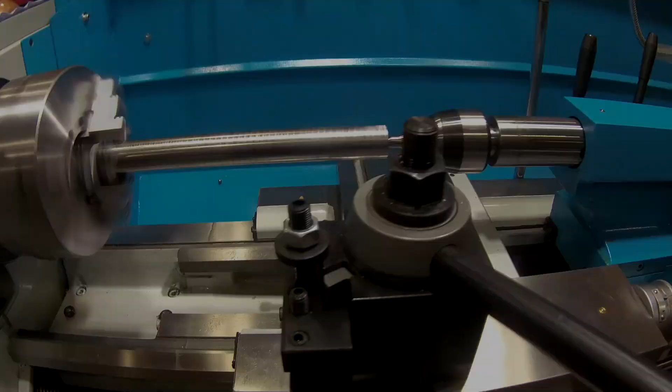This time around we have another interesting project from that welding company I do some work for. They do mostly laser welding, but they've broken out into regular welding. I think this will be MIG. What they need is a fixture to help them put these guys together. Maybe you can tell what they are. I feel like I'm channeling Curtis down in Australia at this moment.

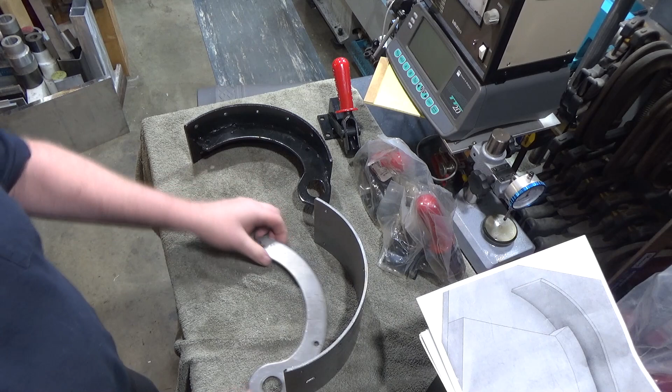I don't know why, perhaps it's because these are brake shoe assemblies for Caterpillar heavy machinery. This is a 4-inch, this is a 5-inch, and they also have a 3-inch, so I have to make a fixture that will hold this piece in place so that it can be welded. It needs to be flat and parallel, and there needs to be almost zero gap between this outside piece and this webbing right here - they call this the web. So there needs to be almost no space here, but as you can see, there's quite a bit. I think you can see anyways.

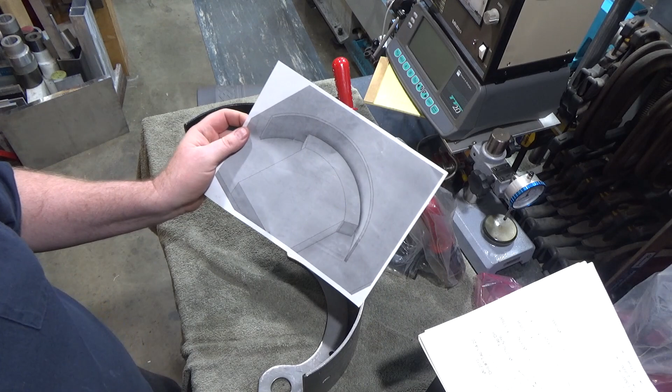So we need to make a fixture and we need to press these pieces together. So that's going to be quite a task. So I've sort of got an idea here. Here's sort of the rough idea of my fixture design. It looks really simple. So basically it is an aluminum piece that this guy sits down into with a lip.

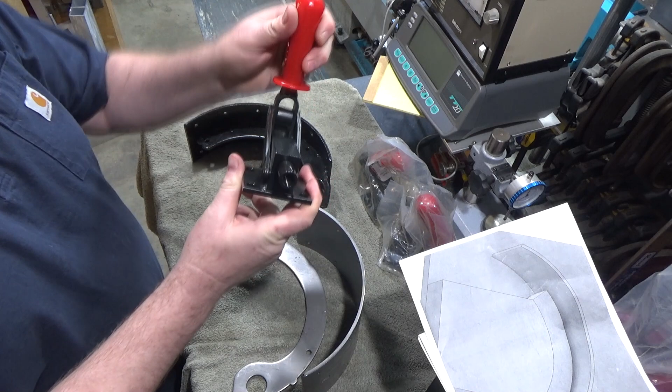And I'm going to press this guy using 3 of these extremely heavy duty, I think they're about 6,000 pound lever pressing feet. I'm not sure what you'd call them. A few moments later: these are called push toggle clamps. And this one's good for about 5,800 pounds holding force, which should be more than plenty, I think.

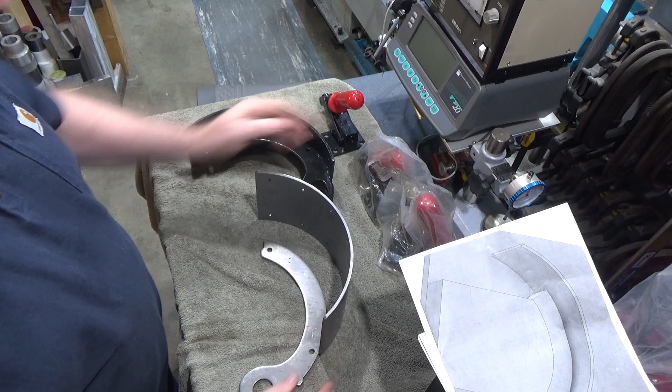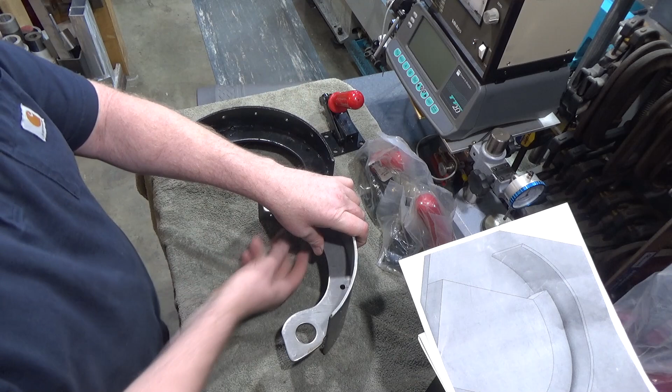I've got to be able to deform this guy, so there will be 3 of them. One will press in the middle to center this guy. This guy is located by this little pip sitting out here. So the first one will press dead center, which will press this guy into the center, and then I'll have one from this side and one from this side to deform this part so that it matches.

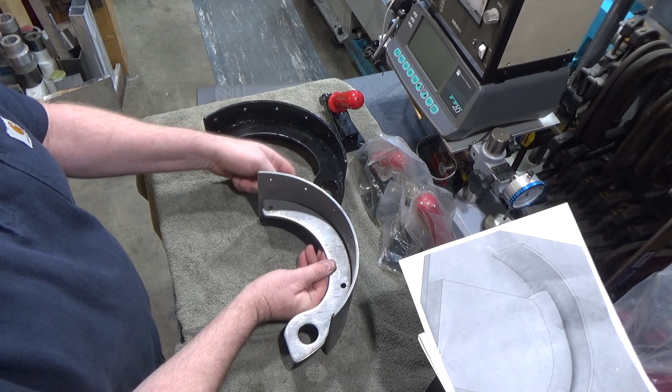Let's see, what else? This will be held at the height for a 5-inch brake pad, or brake shoe - I think these are brake shoes technically, right? So this will hold this at 2.5 inches. For the smaller ones, the 4 and the 3-inch one, what I will do is this guy will be held in space for the largest one, and then for the smaller ones I'll build spacers that hold the plate that the pad is actually mounted on up, so that I can handle one fixture for all 3 types of brake pads or brake shoes.

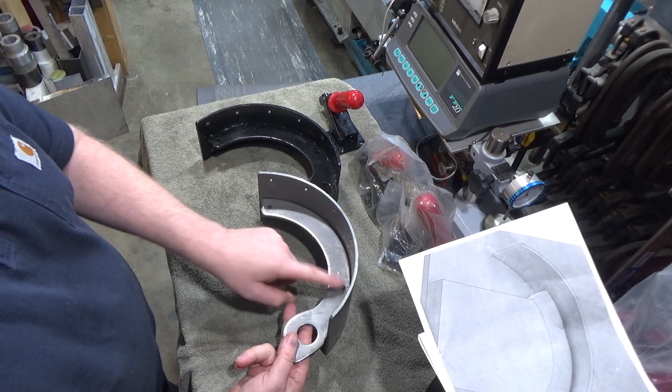I guess again these probably are brake shoes. One of the big problems with this is trying to locate on this part, number 1. Leave enough clearance so you can get a MIG welder to weld like here to here and here to here. All of that is going to be challenging. There are no good location points on this guy. Everything is really loose spec, but then they want the final part to be relatively tight spec. Also, how do you weld one side, then weld the other while keeping it in a fixture?

So what I'm going to do is I'm only going to support it in the middle here, as you can see by this design. So we're going to support this guy in the middle. And that way, when I flip it 180, the part will sit, well, the whole thing 180. The part will sit and also be supported both directions, and the toggle clamps should be able to hold this all together while you do the backside weld.

I think the way it's going to work is they will do 2 or 3 or 4 tack welds on one side, flip the part over, tack weld, weld all the way around, flip it back over. You can take the part out now and weld it all the way over, something like that. I haven't worked out the welding scheme. That is actually for the professionals to do at welding. I am definitely a rank amateur.

Now, the next set of difficulties, besides the fact that everything on this part is extremely loose tolerance - they show a drawing of this part individually and the whole assembly together, and guess what, these datum points, they're varied. You'll notice that this final part has this ground part here, and apparently what they do is they grind this after it's together, as well as this part over here after it's together.

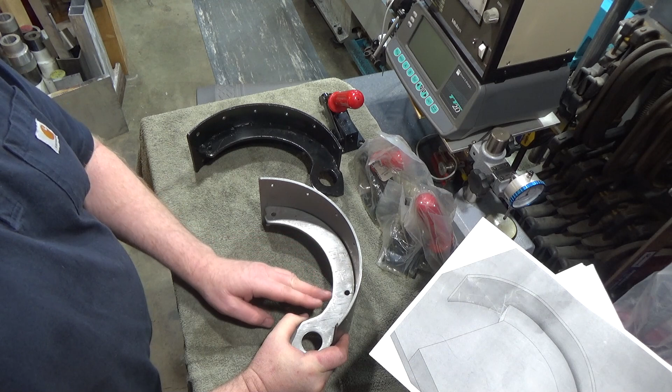We're going to hold it here and press this on, and hopefully that'll be good enough. The one thing they've had problems with in the past is keeping this parallel or perpendicular all the way around and equidistant from both sides. Hopefully we'll solve that, and the part will be accepted when they finally grind it and meet their specs for Caterpillar.

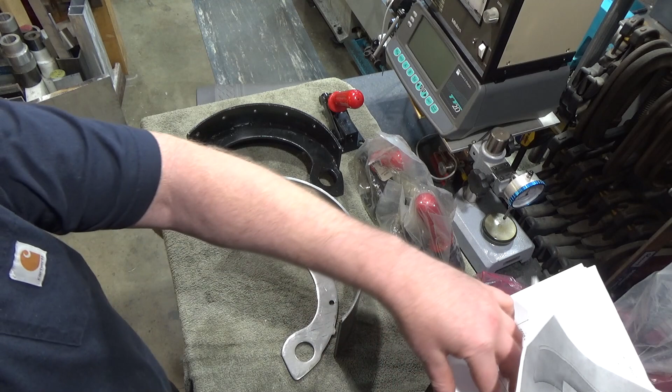The next bit of difficulty is that these radii are so big they're really too big to handle comfortably in my lathe. This is about 11 and change inch diameter. I have a 14-inch swing lathe, but my largest chuck is a 10-inch chuck, which means I'd have to try mounting this to a faceplate.

I do have a very large 12-inch diameter, 3-inch thick round of aluminum. That's one way to do it, and I need to figure out how to mount that to the faceplate safely. The thing weighs like 40-some pounds, kind of a scary thing to be swinging around on your lathe. If it's not perfectly balanced, you probably have to go really low RPM for safety's sake.

However, I think what I'm going to try first is this. I found a scrap piece of aluminum that I might be able to make work. Let me bring you over. Okay, so here's a really decent sized chunk of aluminum.

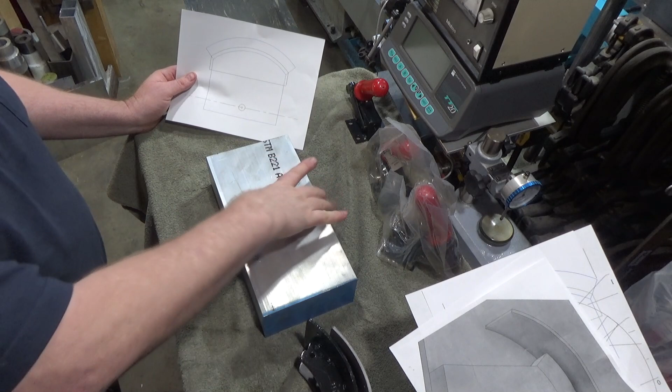It's 3 inches thick, but I don't need 3 inches. I need something like a little bit over 2.5 inches, like 100 thousandths over, so 2.6 inches thick. We're going to remove some material off there. I need the full width, and it would actually be better if it was a little bit larger, but we're going to go with what we've got, so it's not going to be quite as wide as I'd like.

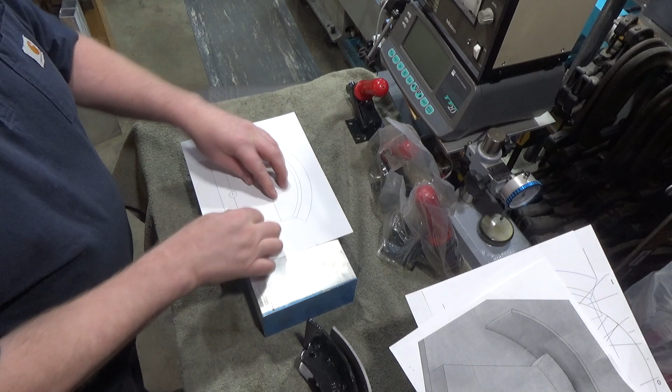Here's the part. It just barely fits edge to edge on this piece. This top part of the radius meets one edge, and the other part is now on the bottom. So I need to cut a chunk of this out, then cut this large radius, and then do an inset portion, because this part will sit right here.

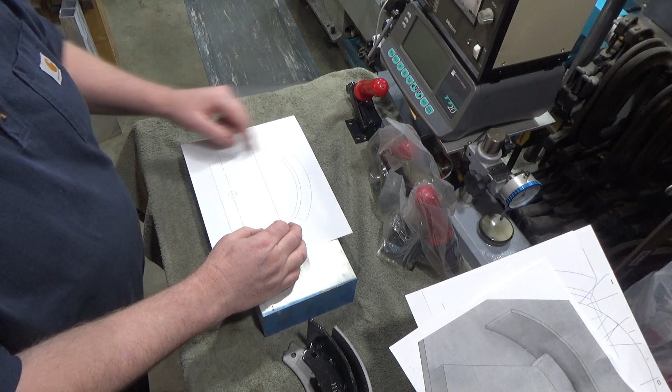So it needs to be inset in this radius right here. I need to machine this outside radius, this inside radius, and then do these cuts here and here. None of these really matter other than for locating this point. I'm thinking about boring or drilling a hole through this for a pin to go down the center, which will help me locate it.

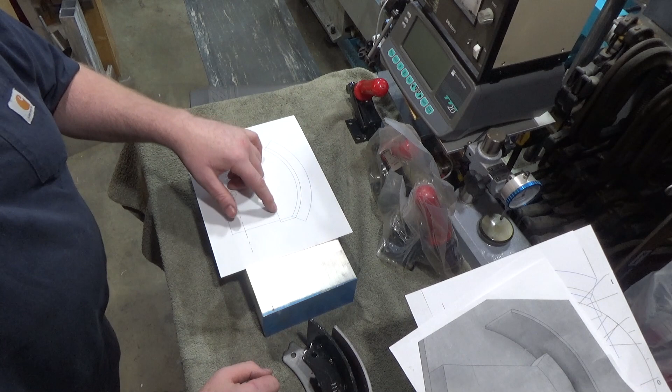Then I've got 4 screw holes going into this piece, 2 of which line up with my rotary table. So we're going to try to cut this outside curve, this inside curve, and this ledge with the rotary table. I know, don't laugh at me, but that's the approach I'm going to take.

I planned the spacing of those holes. This is not a scale drawing, but I do have a scale drawing if you want to see it — I always print scale drawings just so you can see it.

I planned it so 2 of the holes, besides bolting to the base plate, which is a 1-inch thick piece of tooling aluminum, conveniently line up with 2 of the T-slots in my rotary table. There will be 2 more bolts going through as well.

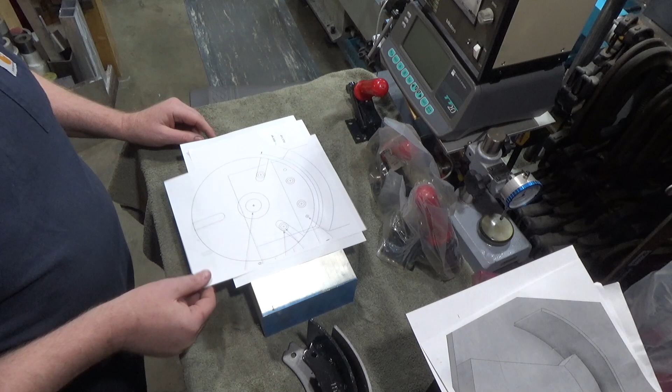On top of that, you can see this green here — that's a plate that will hold this down. So this sits on a ledge, and another plate will fit just over the back of it to prevent it from lifting up. It only overlaps a quarter inch, and I hope that's enough. I'm trying to give as much room as possible for their welder to get in there, so I tried not to do too much, but we'll see.

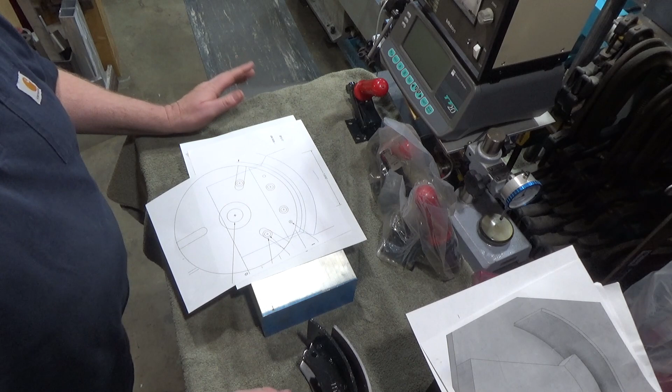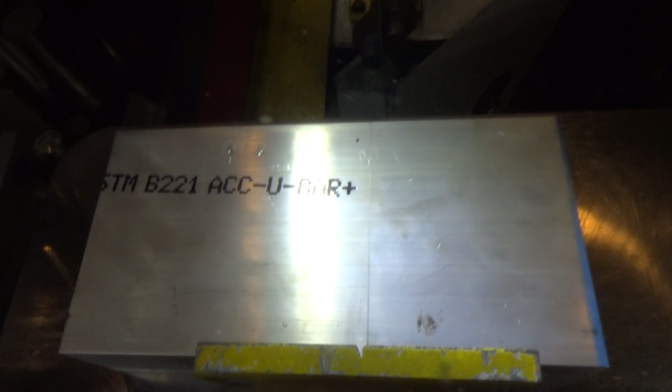This is where we're at. The first step is I need to cut off a chunk of this piece, and then start machining it to dimension. First up, we're going to saw this piece, and you might wonder why I don't have it clamped down — it's because the weight and the saw blade pressing in pushes it against the fence, and it tends not to move at all.

This cut's going to take a while.

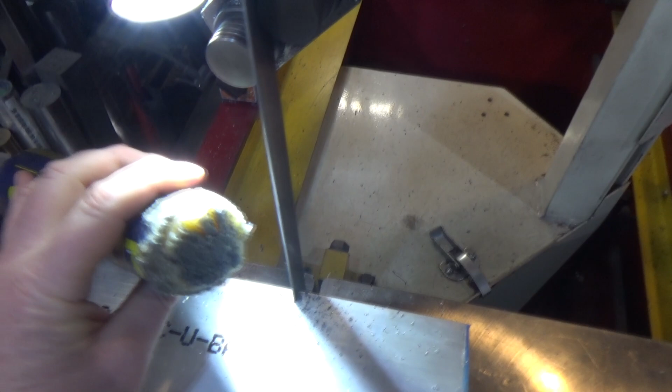I watched a video recently where the guy was saying that rather than putting the cutting wax straight into the teeth like I've always done, you just come at the side of the blade, and that'll be more than adequate.

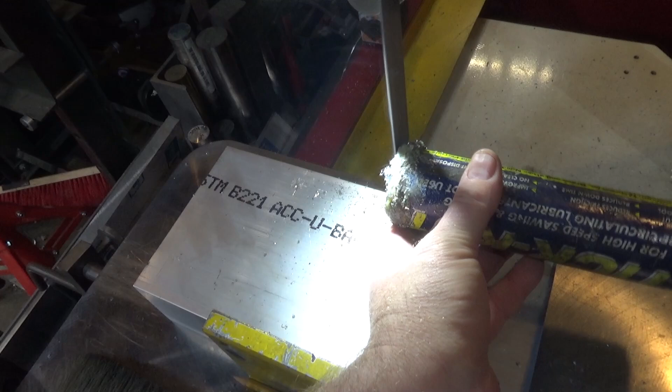I guess that's counting on the set of the teeth to pull the wax in. That actually seems to work.

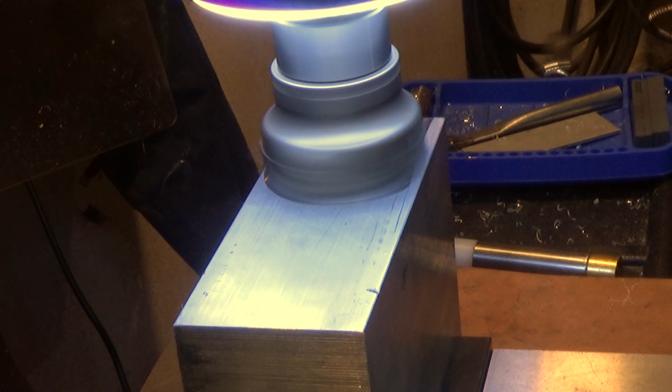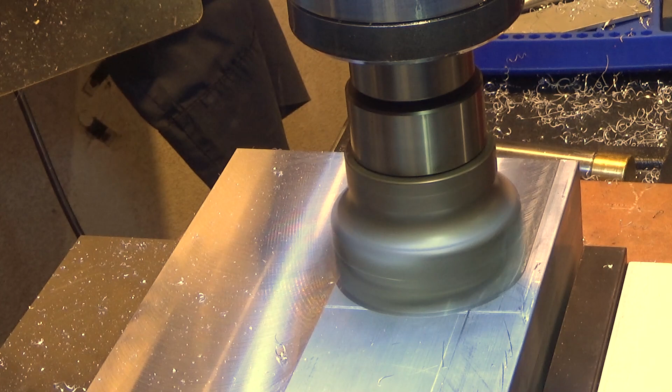Final pass. Stock is dimensioned to thickness. Got this side square to the top and the bottom. This side I'm leaving rough because that's the side that's going to have the curve on it, so I don't care, almost all that material is coming off. Now I just need to do both sides, square them up, and get this width to the appropriate dimension.

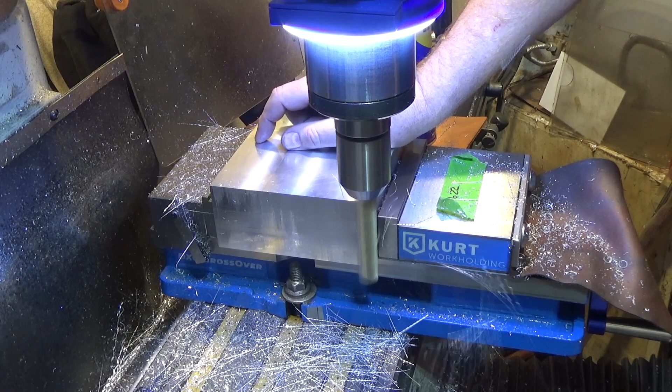So we're going to see a lot of this beast of an end mill. This is a 3/4 inch end mill, 3-inch length of cut, and we're going to see a lot of it doing all of these round profiles. I'm just squaring up the side and getting this to dimension.

All right, we're within 1/1000th. One thing you've got to pay attention to when you're using even solid carbide cutters like this one, when you're doing a 3-inch cut or 2 and change depth of cut, there's deflection.

So I don't make my measurement till I've done 4 passes back and forth, where the first one removes a lot of material, then a little bit more, well, a whole bunch less but still a significant amount, and then it removes a fine amount on the last 2 passes and just cleans it up. That way I'm sure I can be repeatable. Otherwise, the deflection is seriously a problem.

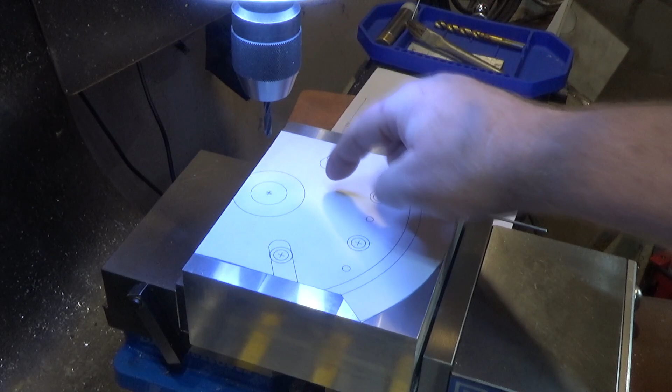Next up, in order to put this together, you can see the rotary table underneath there. There's the T-slots in the rotary table, and that's the edge of the rotary table. We need to turn this radius and this other blue line radius here, but before that, I need to find some way to mount it to the rotary table.

So there's going to be a locating pin in the middle, 1 inch. We're going to drill that and bore that. That's going all the way through this beast of a piece here.

Then I've got to drill these mounting holes, which I made line up so they'd also fit in the T-slots of the rotary table, and that, along with the pin for orientation, is what will hold it down. Then I need to drill these 3 holes for tapping.

Those holes will be for the plate that sits on top, gets screwed down, and holds the webbing piece centered. Then there are 2 more holes that hold this to the base plate as well that need to be drilled. These are drilled and counterbored for cap screws. That's what we're going to do.

So first I'm going to start with the number 7 drill, which is the proper tap drill for these. I'm just going to pre-drill all of these other holes with starter holes, and then come back and do the other ones to size. That makes sense.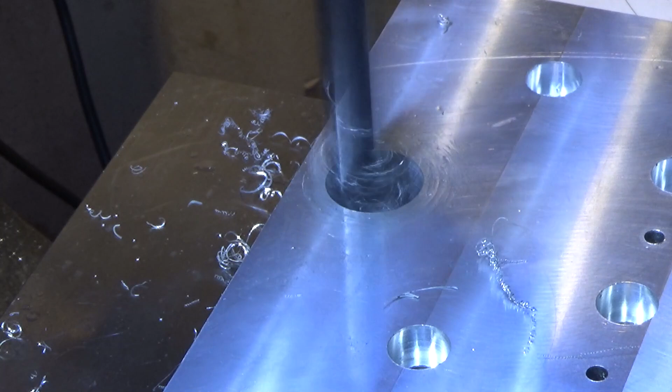Boring out the 1-inch hole. Should be the last 9/1000ths, should put us right on. I was using an indicator on the side of the boring head to control how far out it went, so I can be much more accurate about the holes rather than using the dial there.

I never trust it. It's probably good that I don't. So I've got to remember I'm reading radially with the dial indicator. There's the fit on the Morse Taper 3.

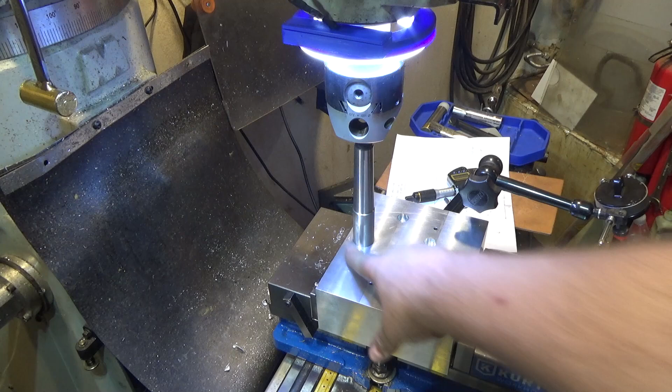We're good. I might make another one of these out of hardened material, because this is just plain old cold rolled, and it gets scratched pretty easily, even though this is aluminum. You can see little dings here that I had to stone off.

So yeah, I think we're going to have to do something about that. Here's the piece partially done. The hole is bored, and I found out what was causing me my problems, and that's because there was a chip in my carbide tooth on the boring bar, although I couldn't see it even under magnification until I looked further, and that's why I was scoring up the side of this.

So I made it a little oversized, so I might make just a slightly larger mandrel. This one's undersized and it's not hardened material, so I'll probably make one of these instead out of hardened material and make it to size for this so it doesn't slop around. It's unfortunate that's how it worked out, but this isn't a specific diameter or anything. I just chose an inch because it's convenient. Right now, instead of 0.998, it's like 1 inch on the money. So that's not terrible, right?

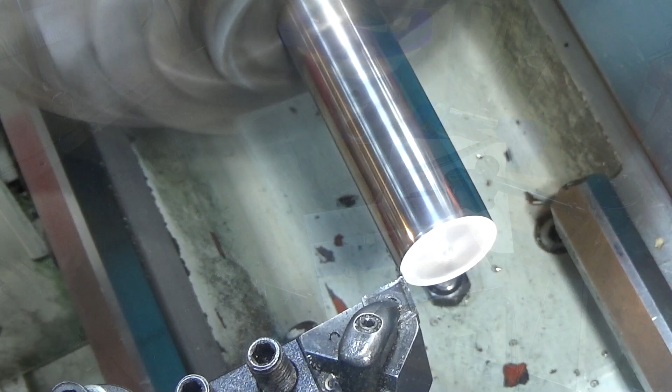Okay, we have a piece of 4140 pre-hard here, and we're going to use this as a dual purpose tool. One is it's part of the final assembly, which will help distribute force on this guy. It's going to fit in this hole and help provide force distribution there. It'll also help me align this guy on the rotary table.

So I've faced it off. Let's take a 50 thousandths pass. It's kind of a mediocre finish. Added some tailstock support, switched to a Kennametal larger radius cutter rather than a positive rake one. Oh yeah, much better finish already. Look at that.

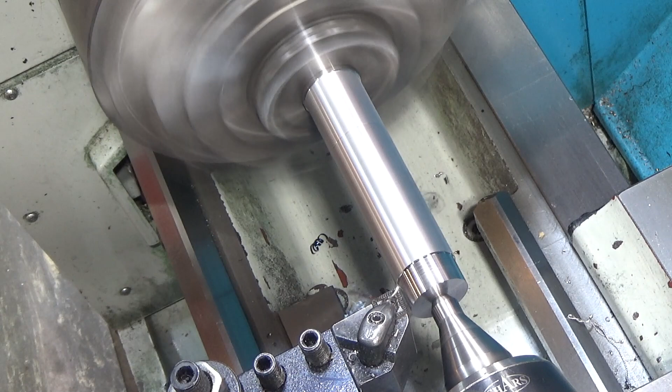I'm going to have to part this guy off. Just removing any little tooling marks, or most of them. Only took 3 attempts, but we got there.

This is no wiggle, very smooth fit. So it's a sliding fit, but absolutely no wiggle, even way out here, which is—oh, there's a tiny bit right there. But really good. That will work for me.

So we need to part this guy off. I made it 1,000th undersized, so that's why it's as much of a loose fit as it is. Okay, got the right dimensions, so we can part this guy off.

Trying to see how little a nib I can get. It's going to break on its own. There it goes. It's actually pretty small, you can barely see that nib. All right.

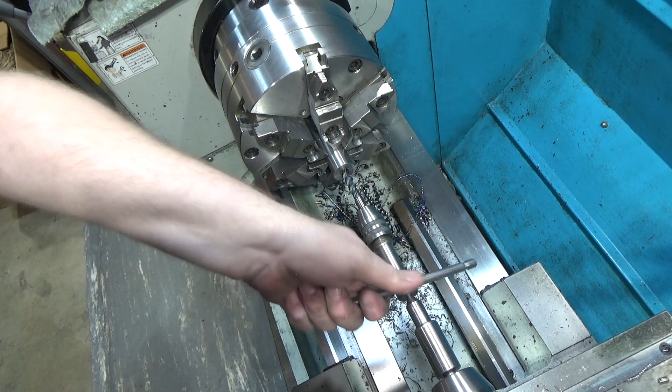Just going to manually tap. This is hardened material, so it's a little challenging, but it's going pretty nicely. These fine pitch threads make it easier because they're not as deep, so not as much force is required.

Okay, the face on this guy is ground, so hopefully that'll get it so this face is parallel to this face, and that should be the case. So I think we're good to go. So now we've got our pin. The threads we obviously won't need when we use this as a pin on the plate, but that's okay.

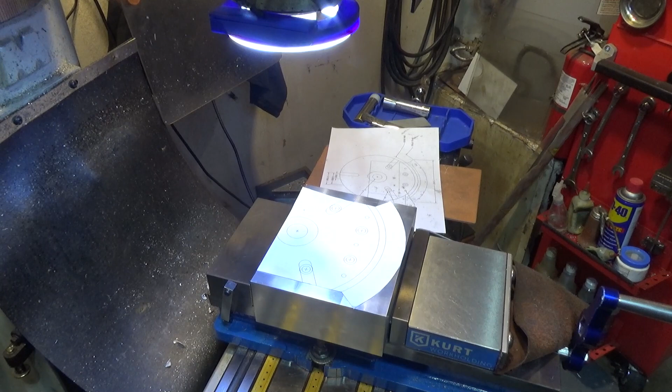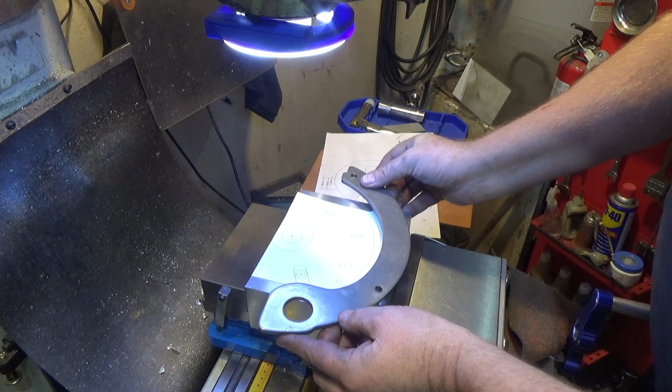All right, so let's give you a rough feel for what's going on here. I still need to remove this material here, this material here, and here, and here. I'm going to wait to do that on the rotary table, because right now all of these other holes, including that 1-inch hole, are centered exactly about these sides here, so that's essential. The only part that comes in contact—I could actually bandsaw these out and leave them rough because it doesn't matter at all. This part here only contacts where the blue line is, and I don't have it centered quite properly, but it sits something like this here. And then it's got to flip 180 and hit the other side.

Now they've got a compound angle right here, so I might actually have to remove some material that supports right there as well on both sides. I don't know why they chose to do that, but it makes it particularly challenging. They've got a standard radius from here to here, and then there's another different angle right here, a different circle radius, much larger I think. I'm not sure, but the drawings unfortunately don't help because you can't find the center of those circles very easily. They don't give you enough information on the drawings to find them.

So anyways, that's how it's going to sit. This part will first go this way, then the whole assembly will flip over this way, and it'll be pressed up against where that blue line is there with this edge here, which is nasty. So that's going to also be interesting. Anyways, that's kind of the plan.

So I'm going to wait till I hit the rotary table before I think about removing this material here, this excess on the side. And of course the curve we're going to do on the rotary table. Then we're going to remove this material also on the rotary table. That goes down like, well, not quite a quarter inch. This is 200 thousandths roughly. And that's it.